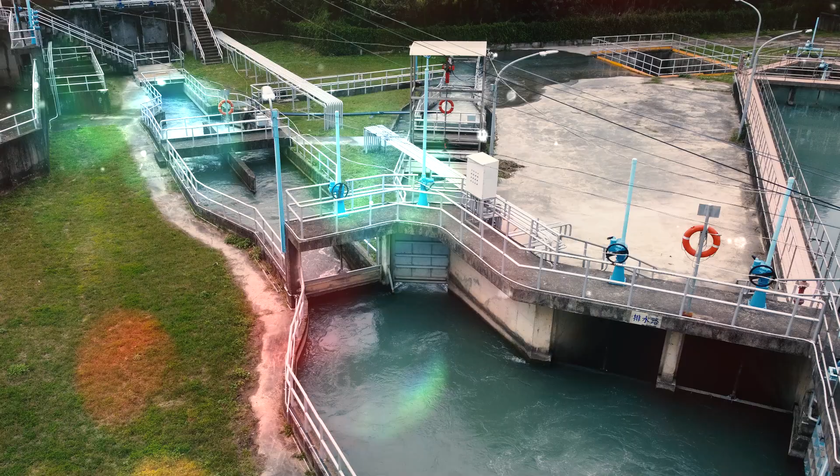The Hsinchu Waterworks, located in Hsinchu town, primarily sources its water from the Longen Canal. It was completed in 1929, with a water output of 5,000 cubic meters per day, supplying water to 30,000 residents in the Hsinchu area. The predecessor of the Hsinchu First Water Purification Station was the Hsinchu Waterworks. It was renamed in 1930 as the Hsinchu First Water Purification Station, with increased water output to 89,000 cubic meters per day, supplying water to residents in the Hsinchu area.

The Mingde Water Purification Station, located in Touwu Township, Miaoli, mainly sources from the Mingde Reservoir. It was constructed and completed in 1976, with a water output of 45,000 cubic meters per day, supplying water to residents in the Daping area of Hsinchu and Miaoli region.

The Dongxing Water Purification Station, located in Toufen Town, Miaoli, primarily sources from the Yongheshan Reservoir. It was constructed and completed in 1985, with a daily water output of 240,000 cubic meters, supplying water to Miaoli, Zhunan, Toufen, Zaoqiao, Houlong, areas west of the Hsinchu Western Line Railway, and the Hsinchu Science Park residents.

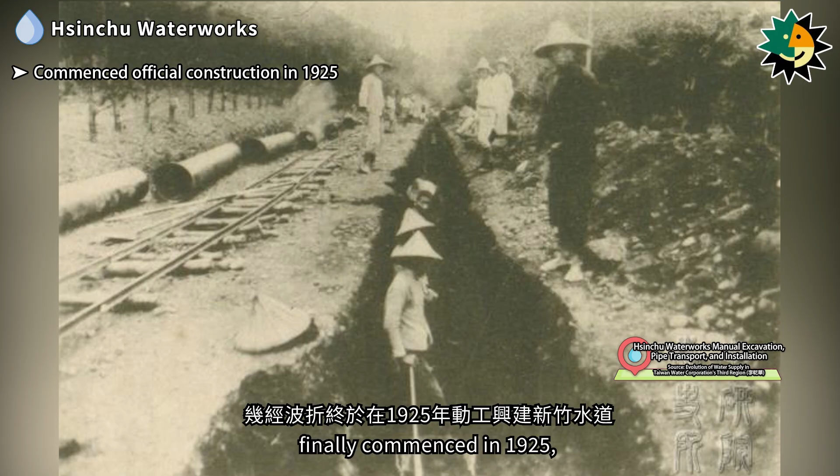The Taiwan Governor General's Office began planning the waterworks construction for Hsinchu Town in 1914. After several setbacks, construction of the Hsinchu Waterworks finally commenced in 1925, and the completion and water supply ceremony was held on March 15, 1929. The designed water output is 5,000 cubic meters per day. The headwater of Hsinchu Waterworks comes from the Longen Canal, a tributary of the Touqian River. Its construction aimed to provide water for agricultural irrigation and domestic use.

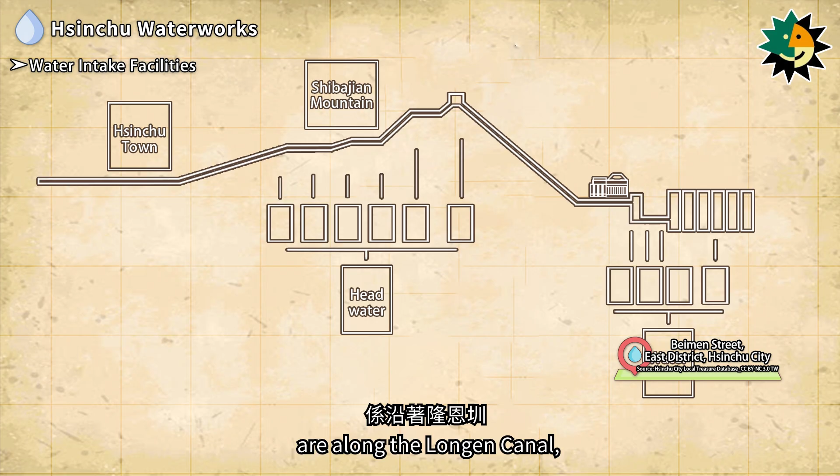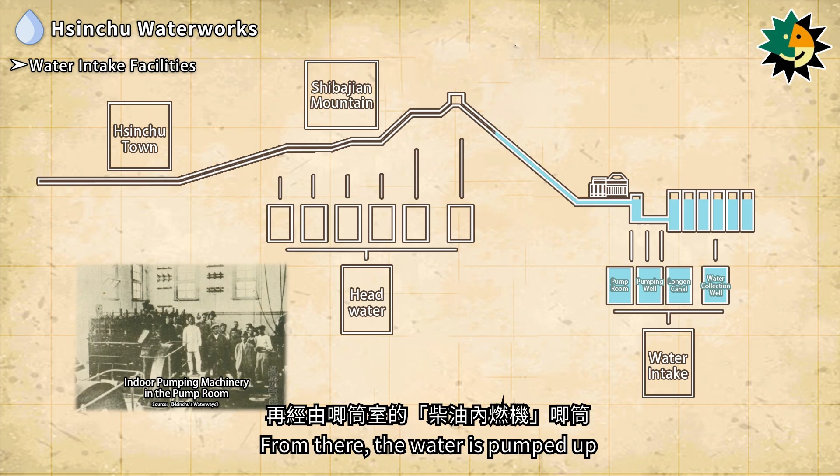The water intake facilities of Hsinchu Waterworks are along the Longen Canal, consisting of 6 water collection wells gathering hyporheic flow, leading the water through water diversion pipes to a pumping well. From there, the water is pumped up by a diesel engine pump in the pump room to the Hsinchu headwater point on the mountainside of Shibajian Mountain at Chituki.

The Hsinchu Waterworks water intake point was listed as a historical building in 2011 and underwent restoration in 2015. The pumping well is made of reinforced concrete. The pump room's exterior is a facial washed terrazzo reinforced concrete wall, and the roof is a wood-framed structure. The pump room also retains some diesel generators and overhead cranes.

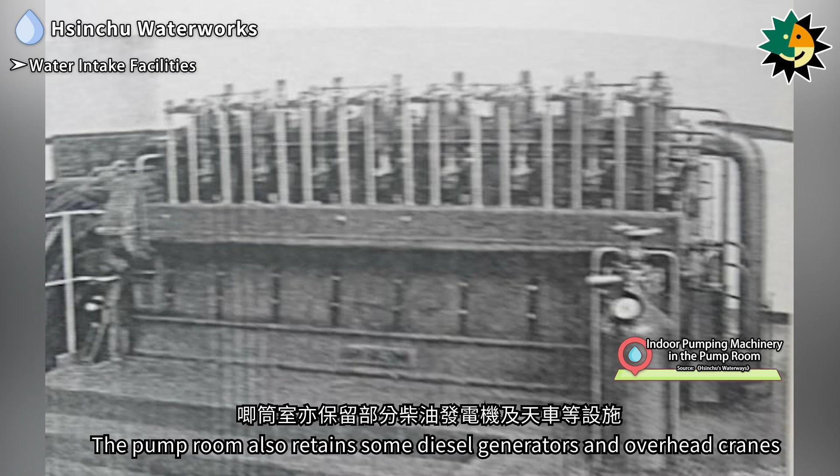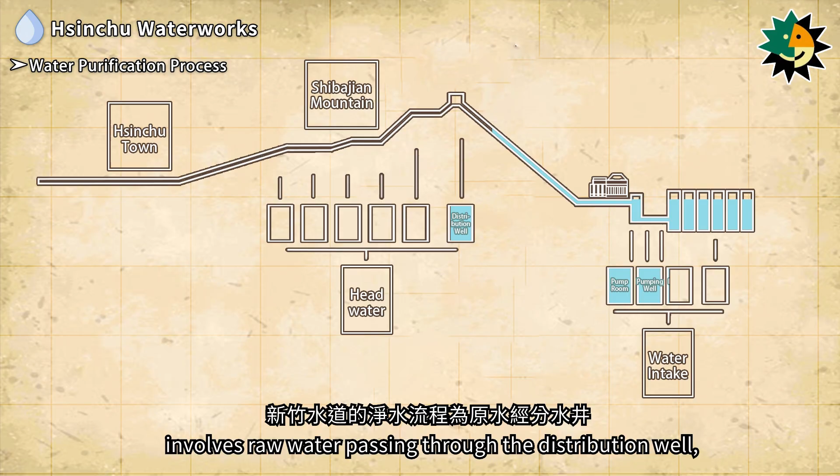The water purification facilities of Hsinchu Waterworks include a distribution well, sedimentation tanks, sedimentation wells, sand filter wells, and clear water reservoirs. The water purification process for Hsinchu Waterworks involves raw water passing through the distribution well, sedimentation tanks, sedimentation wells, sand filters, and sand filter wells, and then going to the clear water reservoirs.

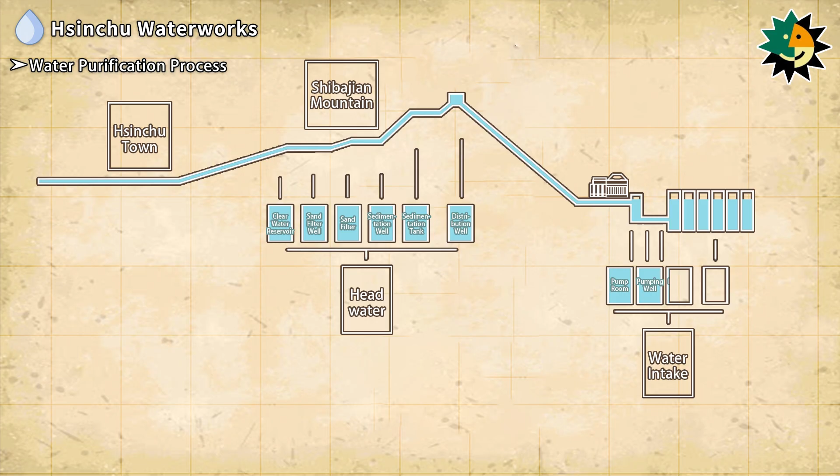In 1930, Hsinchu Waterworks was renamed the Hsinchu First Water Purification Station, increasing its water output to 89,000 cubic meters per day, with a maximum water purification capacity of 100,000 cubic meters per day. The Hsinchu First Water Purification Station has the function of adjusting the Hsinchu Second Water Purification Station and supporting the Baoshan Water Purification Station to ensure no water shortage in the greater Hsinchu area. The water supplied meets the standards for drinking water quality.

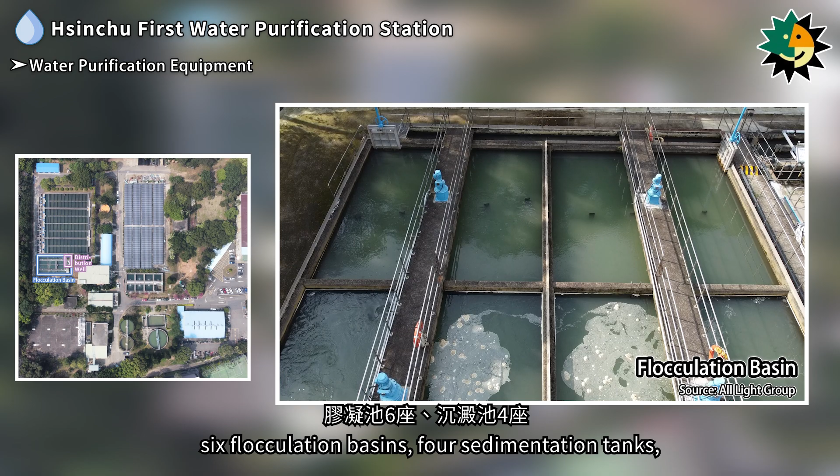The purification equipment of the Hsinchu First Water Purification Station includes a distribution well, 6 flocculation basins, 4 sedimentation tanks, 8 rapid sand filters, 3 clear water reservoirs, chemical tanks, wastewater basins, primary sedimentation tanks, 2 thickeners, a dewatering house, and a sludge cake storage tank.

The water purification process of the Hsinchu First Water Purification Station starts with raw water passing through the distribution well, then treated in flocculation basins, sent to the rectangular inclined plate sedimentation tanks, then to the Greenleaf rapid sand filters, and finally to the clear water reservoir. The wastewater from the sedimentation tanks and backwash waste from the rapid sand filters are sent to the wastewater basin. The supernatant from the wastewater basin can be recycled to the distribution well, the supernatant from the thickeners can be recycled to the wastewater basin, and the sludge is externally disposed of for reuse.

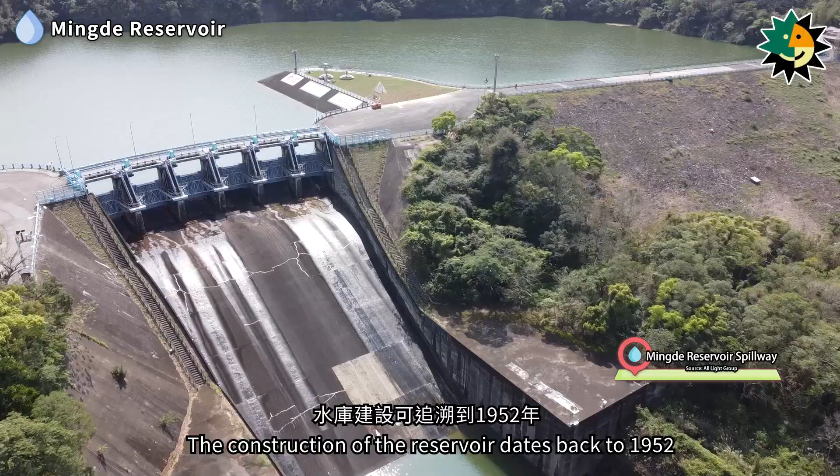Originally named Houlong Reservoir, Mingde Reservoir is located on Lao Tien Liao Creek, a tributary of Houlong River, and is the primary headwater for the Mingde Water Purification Station. The construction of the reservoir dates back to 1952 with the establishment of the Mingde Reservoir Design and Survey Team. Construction began in June 1966 and was completed in May 1970.

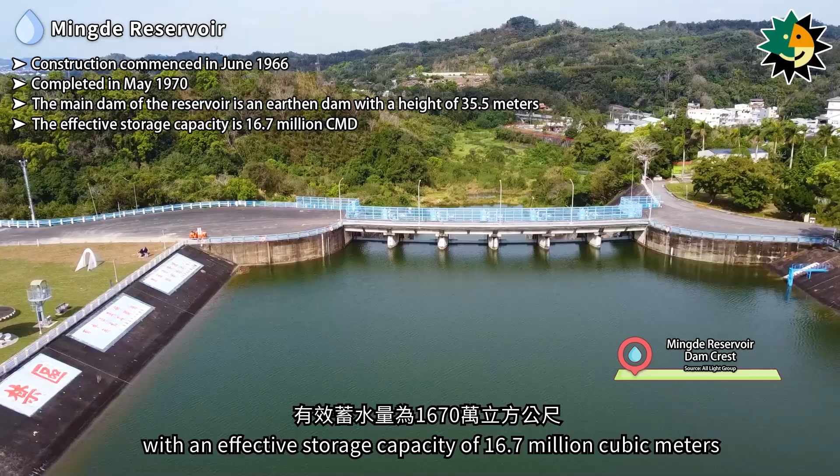The main dam is an earthen dam, 35.5 meters high, with an effective storage capacity of 16.7 million cubic meters. It primarily supplies water for agricultural and industrial use in the Miaoli area, as well as some domestic water.

The Mingde Water Purification Station, located in Mingde Village, Touwu Township, Miaoli County, started construction in 1975 and was completed in 1976 with a daily output of 45,000 cubic meters of water.

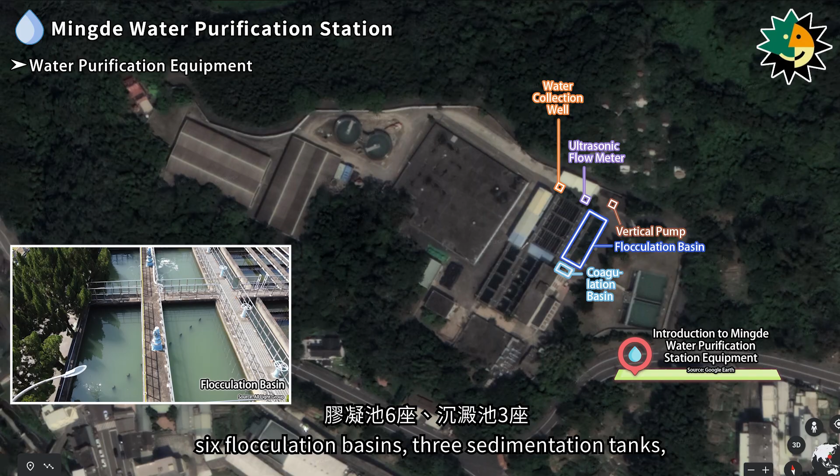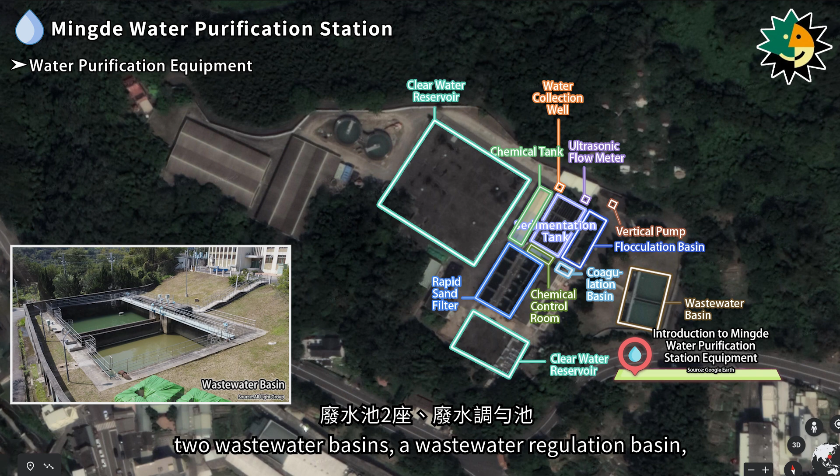The purification equipment at Mingde Water Purification Station includes a water collection well, ultrasonic flow meter, vertical pump, coagulation basin, 6 flocculation basins, 3 sedimentation tanks, 2 chemical tanks, a chemical control room, 8 rapid sand filters, a clear water reservoir, 2 wastewater basins, a wastewater regulation basin, 2 sludge thickeners, and 2 drying bed areas.

The headwater for the Mingde Water Purification Station comes from the Mingde Reservoir. The raw water is sent to the collection well, then passes through a coagulation basin, flocculation basins, sedimentation tanks, and after chemical dosing, it goes to rapid sand filter treatment before being sent to the clear water reservoir. The wastewater from the sedimentation tanks and the backwash waste from the rapid sand filters are sent to the wastewater basins. The supernatant is then recycled to the collection well, and the purified water is reused.

The water supply area of the Mingde Water Purification Station includes Miaoli City, Touwu Township, Houlong Township, Zaoqiao Township, a part of Longping Village in Toufen Township, and Daping Village in Sanwan Township. It serves a population of about 140,000 people, with a coverage rate of 70%.

The Longen Weir is located at the junction of Zhudong Township in Hsinchu County and Zhubei City, serving as a weir in the midstream of the Touqian River. It was completed in 1998 and mainly functions to supply water to the Hsinchu Second Water Purification Station for public use and irrigation. Longen Weir, together with the Baoshan Reservoir and Second Baoshan Reservoir, jointly supplies water to the Hsinchu area, making it an important water source for the region.

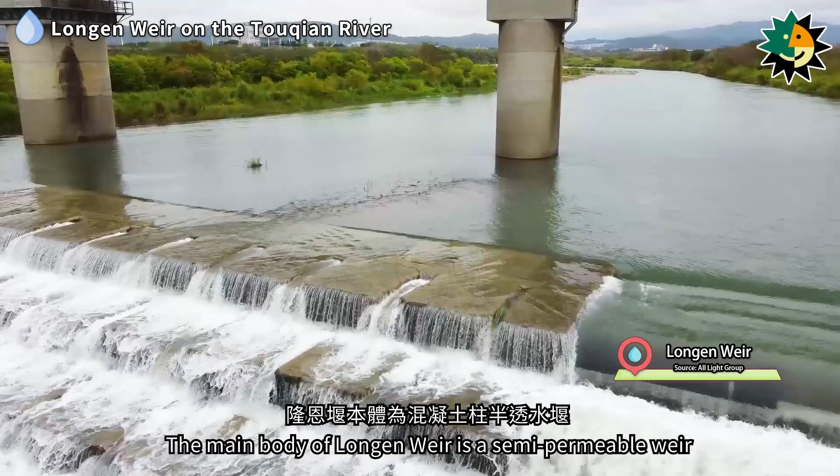The main body of Longen Weir is a semi-permeable weir made of concrete columns. The water is drawn from behind a pipe grill at the top of the overflow weir. This type of weir body and water intake method is extremely rare, with this being the only one of its kind in the entire country.

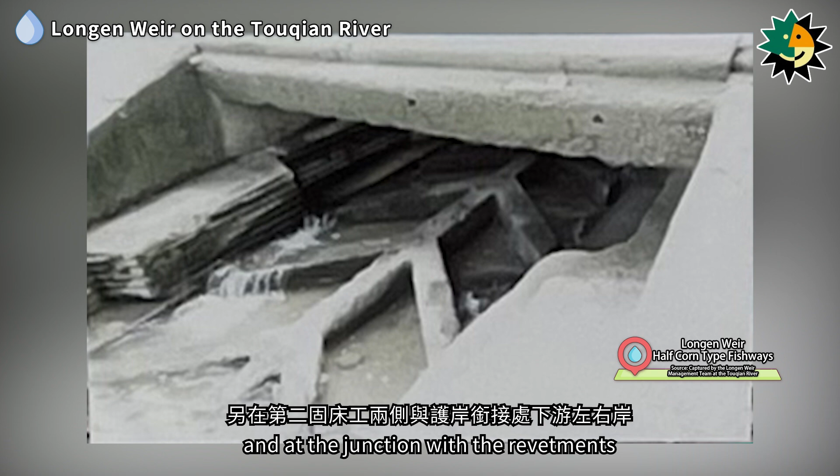On the left wing wall of Longen Weir, there is an improved Larinier fishway. Additionally, on both sides of the second ground sill work and at the junction with the revetments downstream on the left and right banks, half-cone-type fishways are installed to facilitate the upstream migration of migratory fish and crabs.

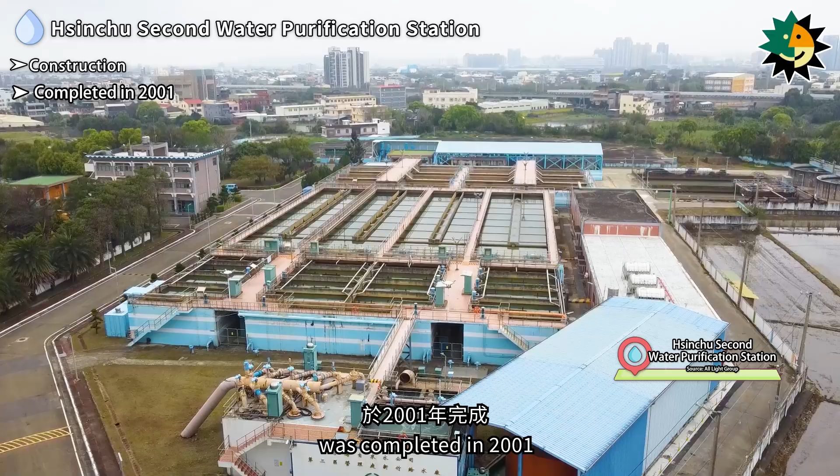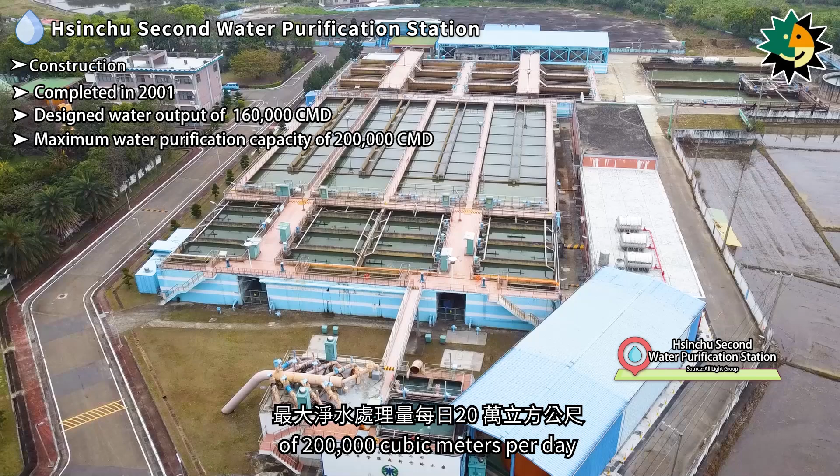The Hsinchu Second Water Purification Station, located in Hsinchu City, was completed in 2001. It has a designed water output of 160,000 cubic meters per day, with a maximum water purification capacity of 200,000 cubic meters per day. The raw water for the Hsinchu Second Water Purification Station primarily comes from the Longen Weir on the Touqian River. The average daily water extraction capacity is about 220,000 to 240,000 cubic meters. Of this, 90,000 cubic meters per day are pumped to the Hsinchu First Water Purification Station using motors.

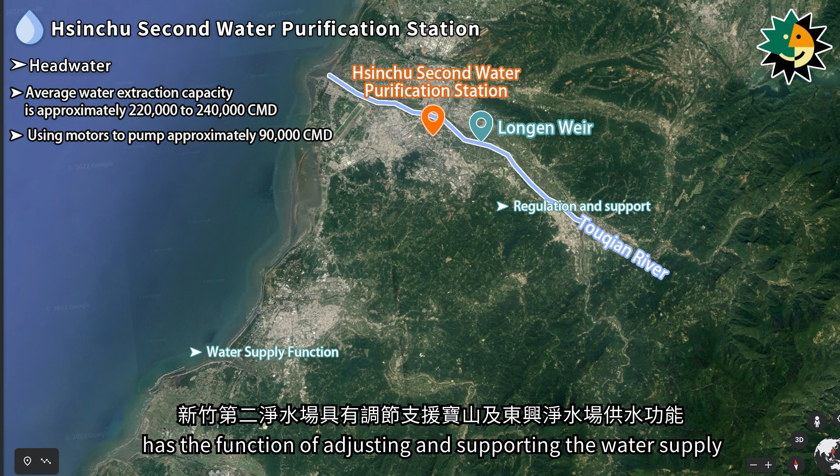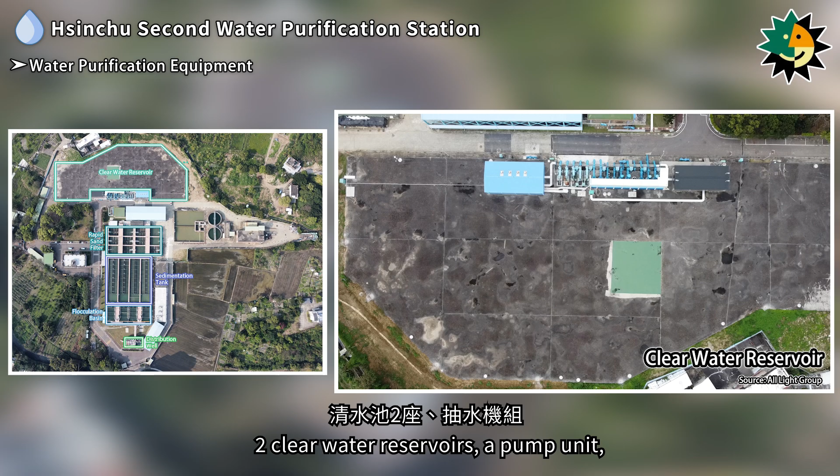The Hsinchu Second Water Purification Station has the function of adjusting and supporting the water supply to the Baoshan and Dongxing water purification stations, ensuring no water shortage in the greater Hsinchu area. The equipment at the Hsinchu Second Water Purification Station includes a distribution well, 4 flocculation basins, 4 sedimentation tanks, 12 rapid sand filters, 2 clear water reservoirs, a pump unit, 2 wastewater basins, 2 sludge thickeners, a conditioning room, a sludge cake storage yard, and a dewatering house.

The Hsinchu Second Water Purification Station obtains raw water from the Longen Weir on the Touqian River. The water passes through a distribution well, flocculation basins, sedimentation tanks, and rapid sand filters, and is disinfected with chlorine before being sent to the clear water reservoirs. The wastewater from the flocculation basins, sedimentation tanks, and rapid sand filters is treated through wastewater basins, sludge thickeners, and dewatering for reuse. The supernatant from the wastewater basins can be recycled to the distribution well. The supernatant from the sludge thickeners can be recycled to the wastewater basins for further treatment.

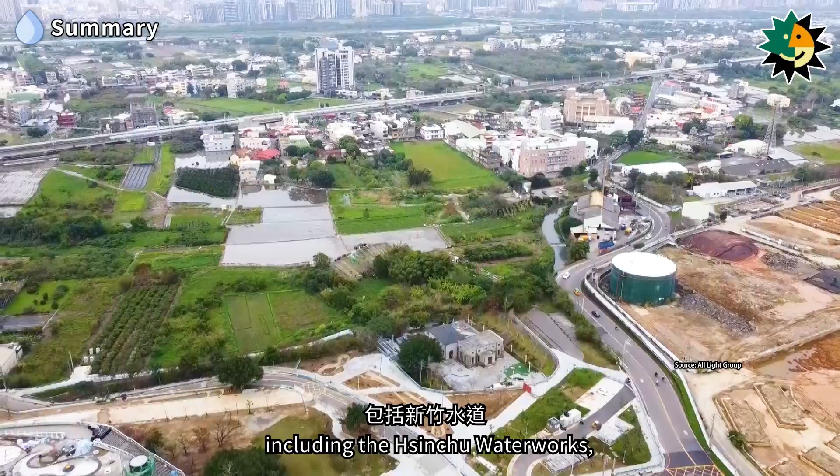This episode introduced the water purification stations in the Hsinchu-Miaoli area, including the Hsinchu Waterworks, Hsinchu First Water Purification Station, Mingde Water Purification Station, and Hsinchu Second Water Purification Station.